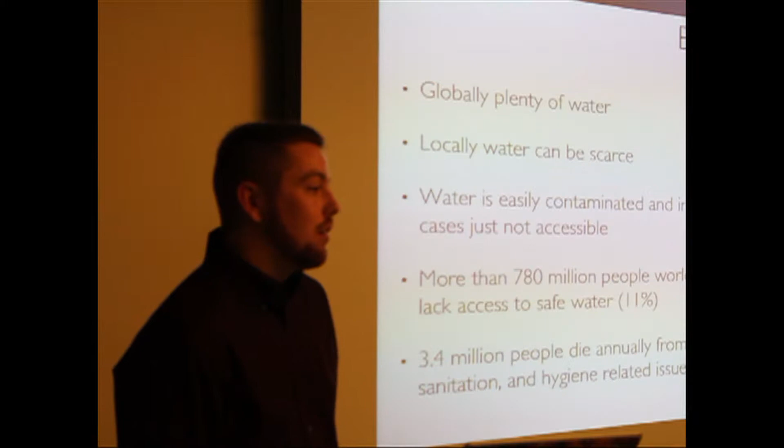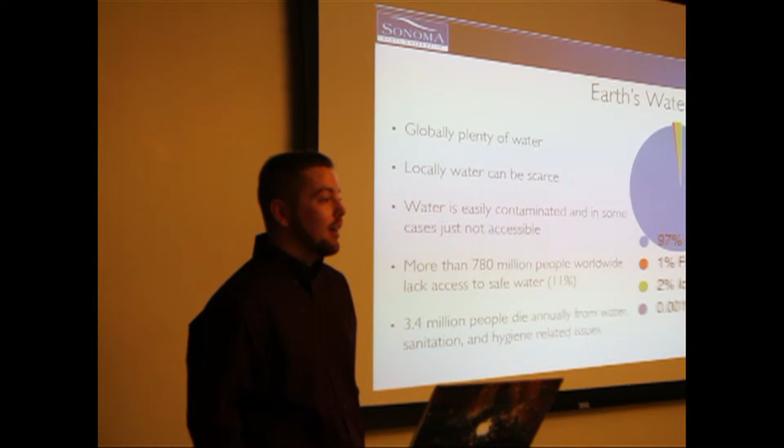Contaminated and is also just not available. And then some facts related to water. There are 780 million people worldwide that lack access to safe, clean drinking water, and that's about 10–11% of the population. In addition, 3.4 million people die every year from water, sanitation, and hygiene-related issues.

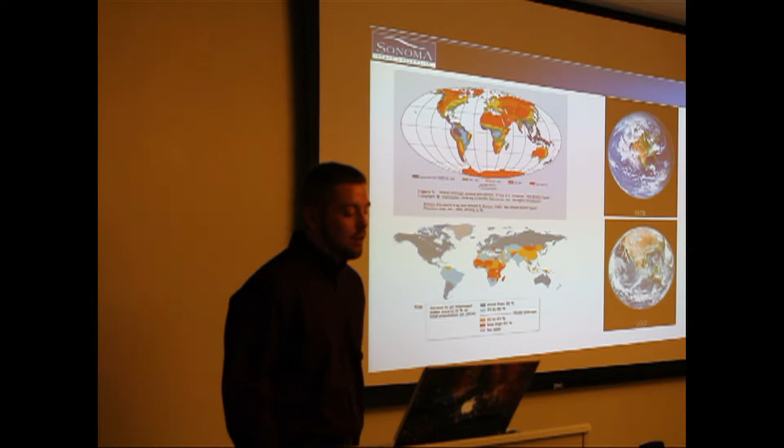And then this lower graph here shows the percentage of population that has access to clean and safe water. The dark blue regions are percentage of population of 96 or higher. The light blue is between 83 and 96. And the yellow is between 65 and 83. The red is less than 65% of the population.

And then the images over here on the right are global images taken by satellites, one in 1978, the other in 2012. And that just shows how much degradation there's been in vegetation due to lack of water.

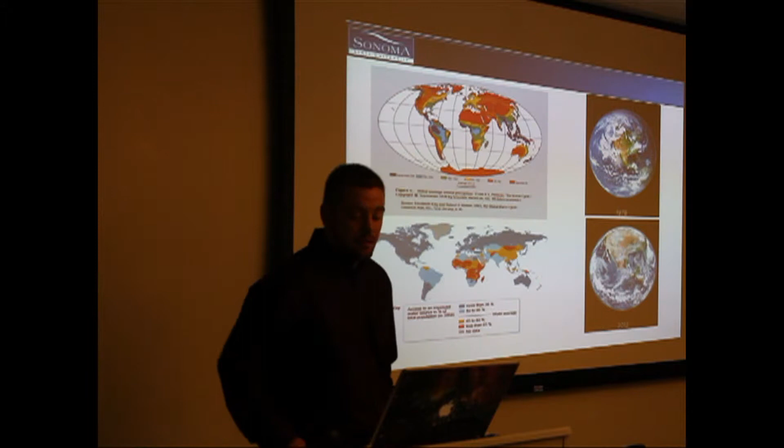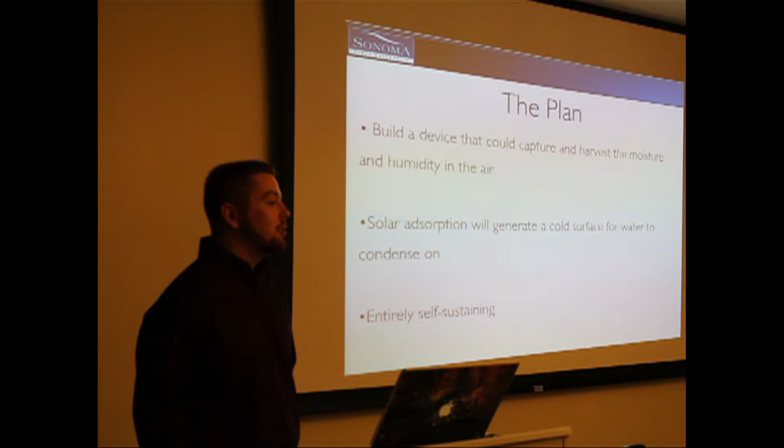So our plan was to build a device that could harvest and capture the moisture from the humidity in the air. And we tried to use a solar adsorption device that would generate a cold surface for water to condense on. And the goal was to make it entirely self-sustaining.

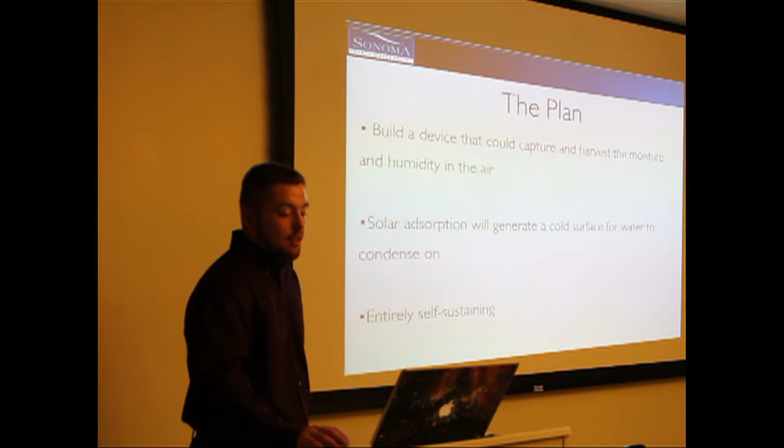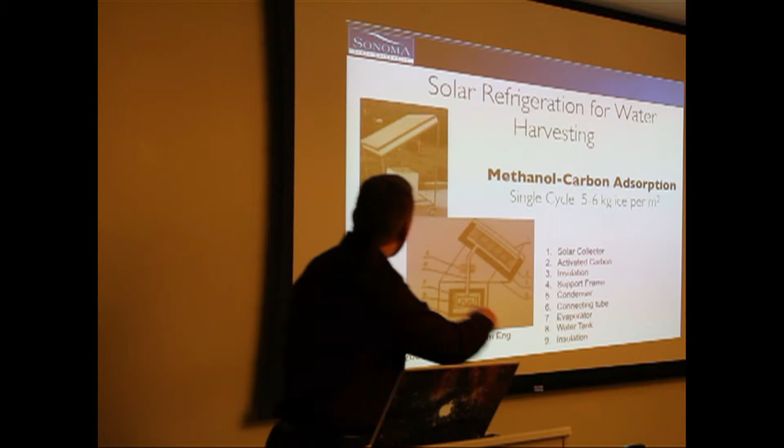So this is a diagram of the solar adsorption. We unfortunately didn't get time to incorporate this with the project, but the basic idea here is that up here will be a carbon methanol solution, and when the sun hits that, the methanol will retract down into a chamber in here, and then when the sun goes away, the methanol will be pulled back up into the carbon, and that creates a pumping effect.

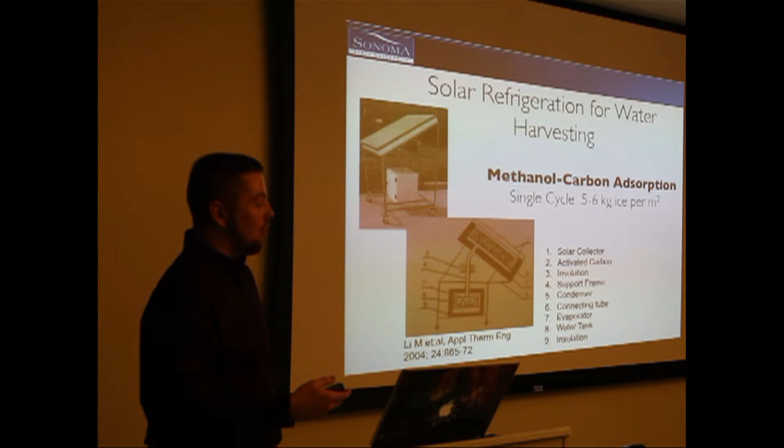And when the pressure goes down, the temperature will also go down, and we can use that eventually to form ice and have water condense on the surface that's holding that ice. So the immediate problems we ran into with this technique is that the water in the air went immediately from a vapor to an ice, and it completely bypassed the water stage, and for us that's just a waste of energy.

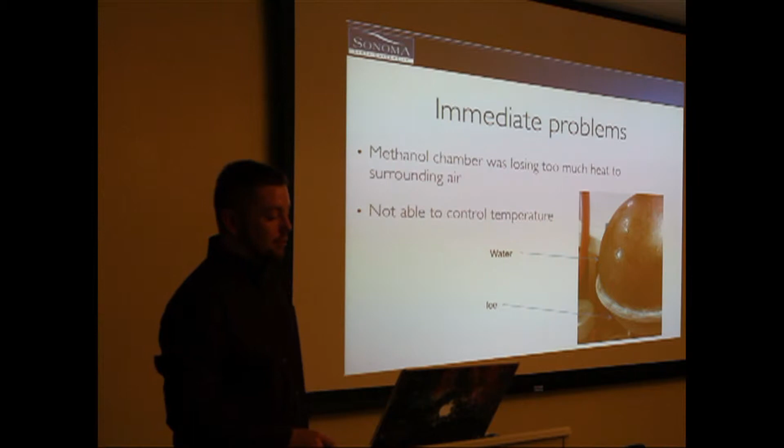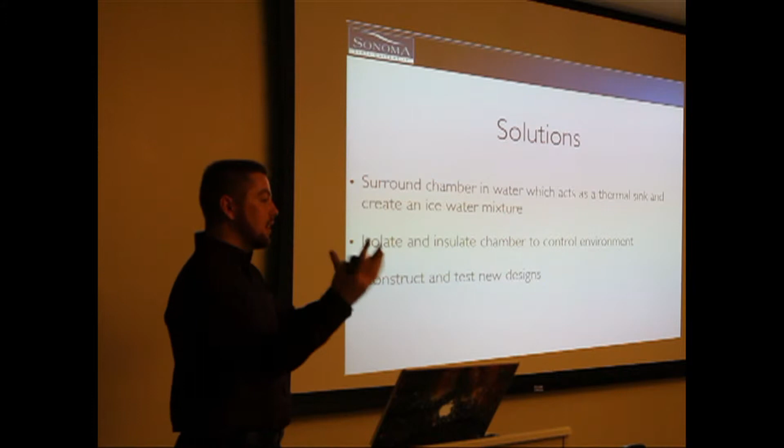So we needed to figure out a way to change our design to incorporate that better. So the solutions that we came up with was surround that device with a chamber full of water and use the water as a heat sink and partially freeze that water, and then the copper that surrounds that ice water solution would be a cold surface that water could condense on from the outside air. And then we also isolate and insulate that chamber so that we can control the airflow and things like that. And then after that, we began constructing and testing the designs.

So this is kind of the schematic I came up with. We have the inner chamber here that would house the methanol, which is this piece right here to give you kind of a scale of what we're working with. And then there's a cone that'll be on the outer chamber here. And then this here is the outer chamber that we made. And it's hard to see, but down here we use tack welding to hold it together. And then after that, soldered the inside to fuse that seam.

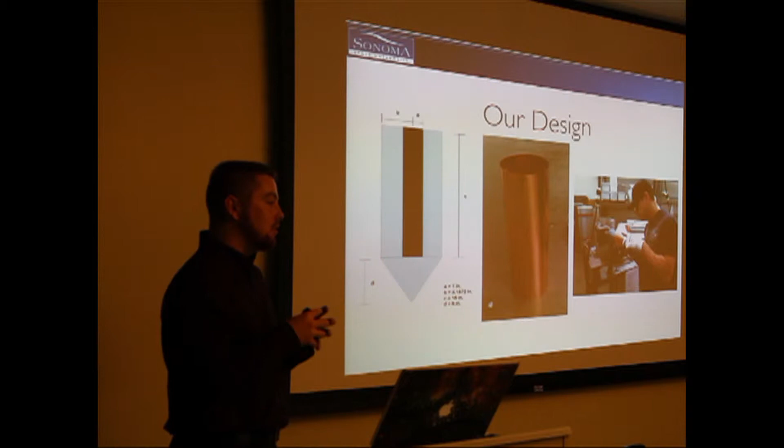And then over here is Steve Jakowski forming the cone that goes on the end of this cylinder here. And that was actually really hard to do. We had to make two half cones and fuse those together. So that was a pretty difficult feat of engineering, but we were able to get it done.

So this is a graph we took of the room temperature. I collaborated with a fellow student, Ben Cunningham. You'll hear from his presentation later. And so this is the room temperature we took during the run. We have the temperature in Celsius along the y-axis and the time it took in hours along the x-axis.

And as you can see here, the temperature kind of spikes, and we believe this is from we started the testing at night around 4:30 or 5 o'clock, and we're assuming that in the evening and over the night the university turns off the air conditioning, so the temperature did go up a little bit.

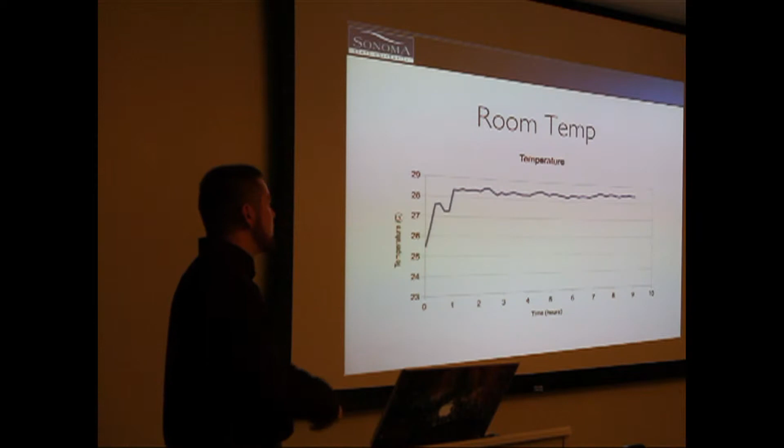And then this is a graph of relative humidity in the room. Again, Ben helped me with this calculation. So we have the relative humidity in a percentage on the y-axis, and time again in hours on the x-axis, and the humidity drops throughout the same time period, and we believe that is again because the temperature went up, the humidity is going to drop a little bit.

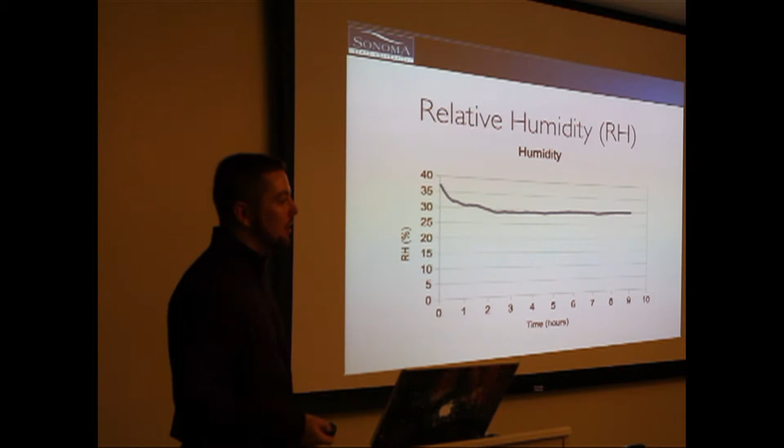And based on those two graphs, those two numbers, we were able to calculate the dew point. And the dew point is the temperature in Celsius at which water can be condensed. And so again, we have temperature in degrees Celsius here, time in hours along the x-axis. And that range, it started at about just under 10 degrees and then dropped down to about 8.5 and then crept up again.

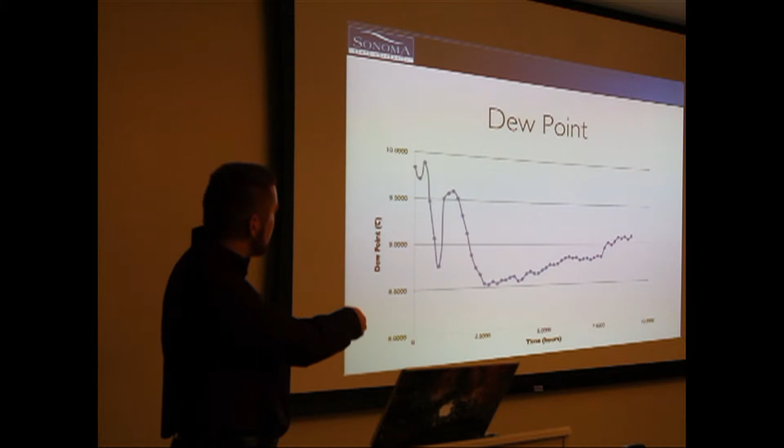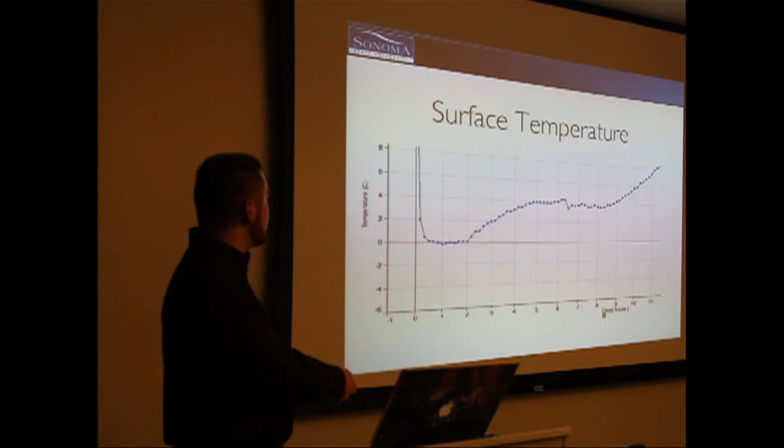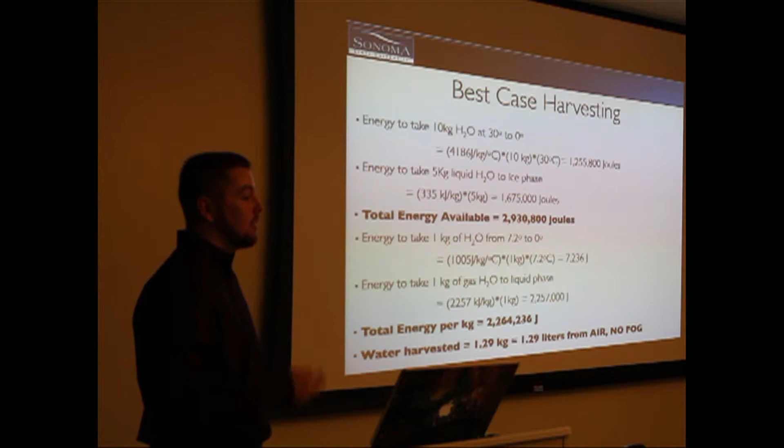So this is just some of the thermodynamics of the system, and this basically explains that the total energy we have available right here is almost 3 million joules, and then the total energy it takes to convert 1 kilogram of water from vapor to a liquid. And with our system, we should be able to eventually get around 1.29 liters of water harvested without any additional moisture from fog.

These are the results we got. So I put in 2 liters of water and 7 kilograms of ice, and that was to simulate the solar absorption device because we didn't have time to incorporate that. And when I had the system insulated with no airflow at all, I was only able to get about 5 milliliters of water. And that's because as all the moisture inside the chamber was condensed and harvested, the air became completely dry and there was no more water available to condense and harvest.

And then I insulated it and turned on the fan and controlled the airflow and harvested between 50 and 55 milliliters. And then uninsulated, just having it sit in the room, I was able to harvest between 95 and 100 milliliters. And I believe this discrepancy is because the fan was blowing at too high of a speed and it was evaporating the moisture before it could be harvested.

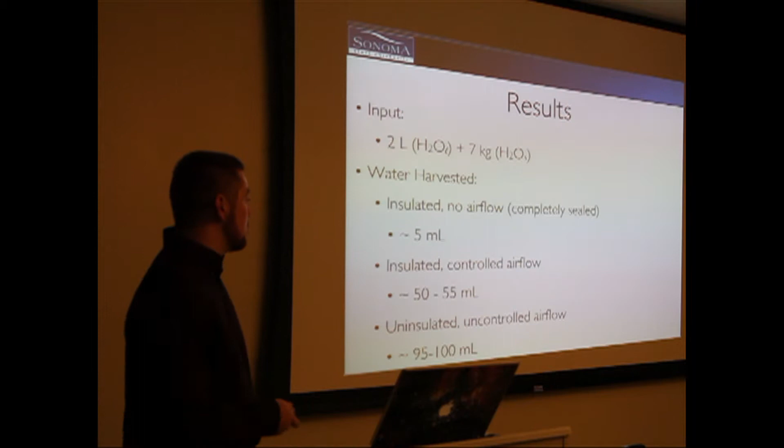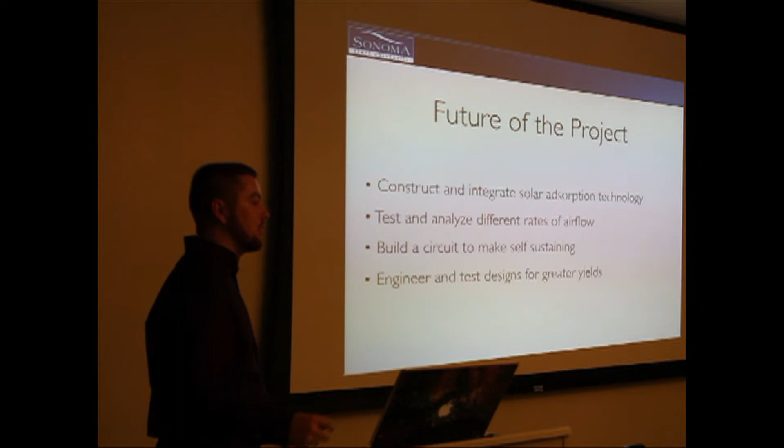And then the future of the project are to build and incorporate the solar absorption technology, as well as change and analyze the different airflow rates. And then we also have equipment from the engineering department to have a solar panel and a battery using a charge regulator, and we can use the battery to run the fan, and then that would help it be entirely self-sustaining. And then new tests, different designs, possibly using copper wool to surround the cylinder would help slow down the air and let the moisture get condensed out of it before exiting the chamber.

And I'd like to thank Dr. Qualls for all of his advice, and then Stefan Jakowski. They really helped me build all of this copper material. Without them, I couldn't have gotten this done. And then Ben, Hunter, and Kevin for all their advice on different engineering designs. And then my family for all their support through these 5 years of school.

Questions? You mentioned producing water, so what humidity levels could this work? Because a lot of the areas are desert. Right. Theoretically, as long as there's humidity in the air, it should work. Obviously, regions with higher humidity levels would see better results. But if there's any moisture in the air, it theoretically should work. So.

This experiment was done in the lab. Yes, that's also true. It was done in the lab where, again, the temperature and humidity is controlled. If it were to be done in an outdoor environment overnight where the temperature drops and the humidity rises a little bit, we'd probably see better results. But I just didn't have time to get to doing experiments outdoors.

Any more questions? So this would be ideal for like Haiti or in a tropical environment, an environment where they have fresh water shortages and problems. Yeah, and environments that are high in humidity, it would also be very helpful for. I think it's a really neat project, and it's a good socially conscious project as well. So let's